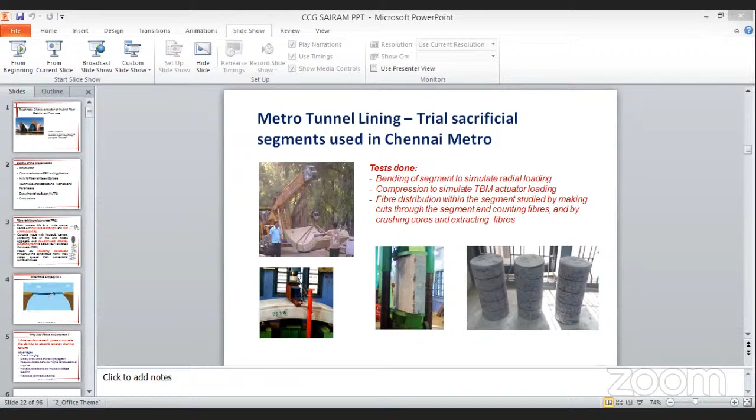Thank you sir for your nice introduction and welcoming me. I am also really grateful to you as a doctoral student - you have guided me so many things during my doctoral committee meeting. I am happy to be part of this online FDP program, and happy to know that Sairam Engineering College is daily conducting webinars and industry interactions, which is really useful for present students as well as our faculty fraternity. It's a very good effort, and I congratulate all the faculties taking so many efforts in bringing out this type of program. So I think I can move on to my presentation.

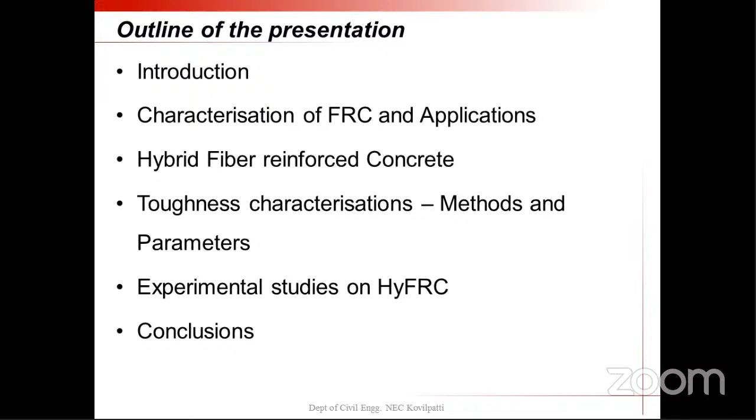In hybrid FRC, the toughness characteristics, measurement methods, testing methods, and what parameters have been considered for the investigation - all those things will be discussed. Based on the results, we can make some concluding remarks based on these measurements.

Fiber reinforced concrete is not a recent technology. It is already developed for the past 4 to 5 decades. So why are fibers added? Because concrete has very low tensile strength and low strain capacity, which may cause sudden failure or brittle failure to the structure.

In order to improve that property and change the behavior of the concrete, these discontinuous or discrete fibers are added inside the concrete. It is added along with the regular conventional material like hydraulic cement, fine aggregate, coarse aggregate, along with the chemical admixture and mineral admixtures. These discontinuous fibers can be added.

This definition is given by the ACI committee: it's concrete made with hydraulic cement containing fine and coarse aggregates along with discontinuous fibers. One special thing about fiber reinforced concrete is that the fiber is distributed throughout the entire composite.

Suppose we want to improve the tensile strength by means of our conventional reinforcement bars - these bars will be located only at specified locations, so it will improve the tensile strength only up to the peak values. Whereas in fiber reinforced concrete, the fibers are distributed throughout the cement matrix, and the fiber spacing is also very close, so it will improve the overall behavior of the cement composite.

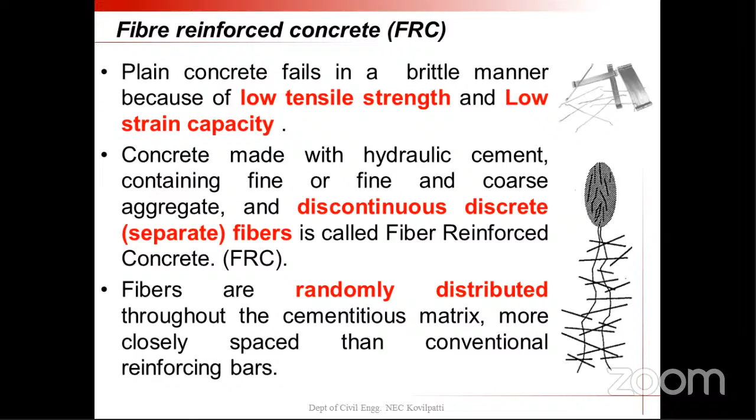It is not only bridging the crack, sometimes it is delaying crack control, delaying the formation of the crack. It will take large amounts of tensile strain before rupture, and especially it provides more resistance during impact and fatigue loading. Some microfibers, which are smaller in size, are particularly used to reduce shrinkage cracking.

So fiber reinforcement mainly gives the concrete the ability to absorb more energy during failure. So far our code has not addressed the energy absorption mechanism, but in future it may be expected, and at that time this research results may be incorporated into the codal provisions to address that particular aspect.

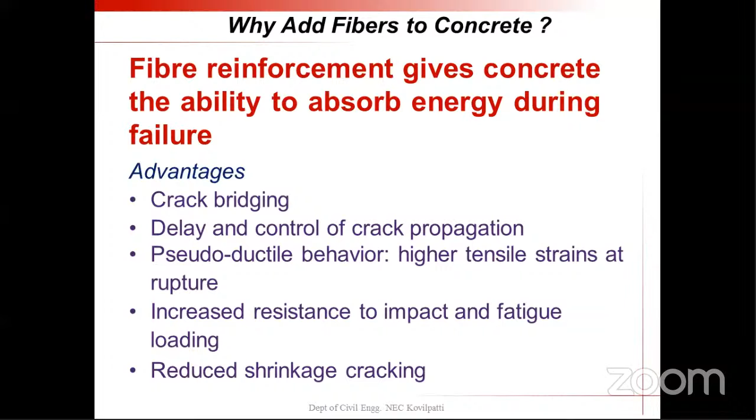So far our code discusses only the strength concept. In future, when we are doing performance-based design, all these toughness characteristics may be taken into account for the design purpose. So I can say the fiber dosage is very small - we can add up to 1%.

Beyond 1%, it's very, very difficult to produce. It needs some special production techniques and equipment. So up to 1%, we can easily do all these things without any workability problem. This is a main point we have to notice.

Some people add fibers and produce results claiming compressive strength has been improved, but totally it is wrong. Fibers are not added to improve the compressive strength, or even tensile strength - it is used only for improving the toughening mechanism, only for improving the energy absorption capacity under various loading.

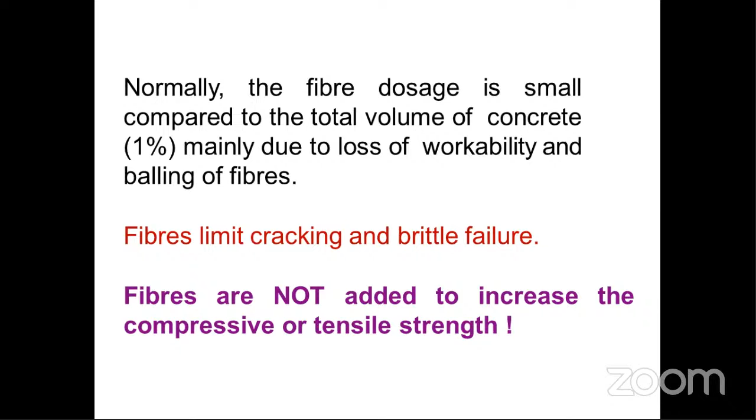One thing I want to clearly define is that fibers are not added to improve the compressive strength or tensile strength of the concrete. It is added only to limit the cracking and to avoid the brittle failure of the structure.

There are so many types of fibers available, and these fibers are commercially available. Metallic fibers like steel, stainless steel, amorphous steel, and polymeric fibers like polypropylene, nylon, polyester, carbon, etc. And mineral fibers like glass and basalt are popular. Nowadays, naturally occurring fibers like sisal, cellulose, jute, and coconut are also available.

These fibers are not one and the same. They surely differ in their properties. Only based on these properties does their constitutive response, whenever included in concrete, get altered. These are the properties taken from Bentur and Mindess's textbook, so we can see different types of fibers.

That is normally used in making cement concrete composites: steel fiber, glass fiber, asbestos, polypropylene, carbon, nylon, cellulose, sisal, polyethylene, etc. Among these, I have worked with steel fiber, glass fiber, polypropylene, and sisal fiber. In addition, recently I worked with Juliflora fibers, natural fibers, metallized plastic waste fibers, keratin fiber reinforced concrete, and sisal fiber reinforced concrete. So easily we can work on fiber reinforced concrete incorporating these types of fibers.

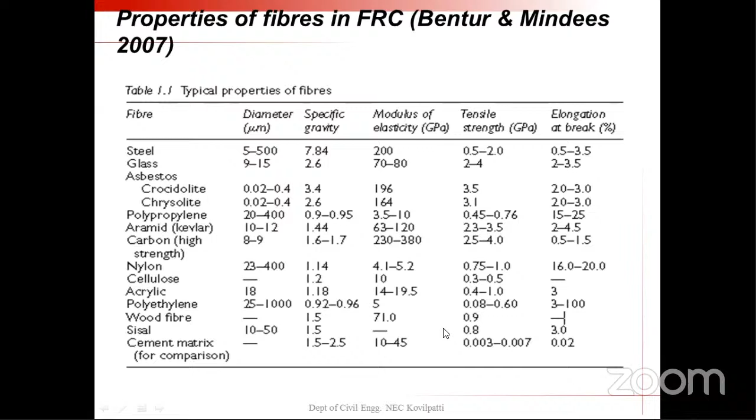This modulus of elasticity and specific gravity, everything is very important. All these factors govern the constitutive response of the fibers when used in the concrete.

This fiber reinforced concrete has been developed for the past 4 decades, and it is still in the area of development. Even though around 10,000 literatures have been published in this area, many practical applications have also been implemented globally and even in our country. I will quote some examples because many people wonder how this research translates to practical application. So to increase that hope and to make FRC a promising material, we should show some practical applications.

I think it's better to project some practical applications where it is used. Steel fiber reinforced concrete is a popular fiber, and most literature has dealt only with steel fiber reinforced concrete. It is used in the shotcrete technique because it provides sufficient resistance against shrinkage, cracking, and impact. It can take impact loads and compressive loads in floors and pavements.

These types of slabs, precast segments, have been used with the incorporation of steel fibers. But even though we are using it for precast applications, some difficulty exists in bringing this concept to structural design. That is mainly because of the lack of available standards, since it is still at the research point and needs more material characterization.

Testing methods also differ from one forum to another. RILEM will recommend one testing method, while the Japanese Concrete Institute will measure the same parameters using a different technique, and ACI will recommend yet another testing technique. So there are many testing methods available, and we don't get a clear idea of which one should be properly followed. That type of confusion still exists in measuring properties for FRC.

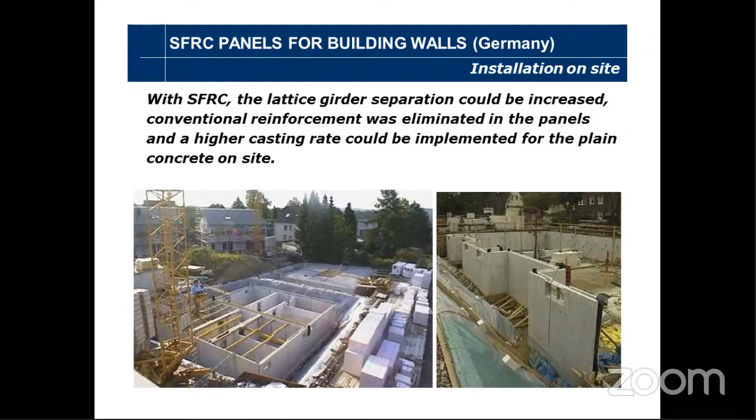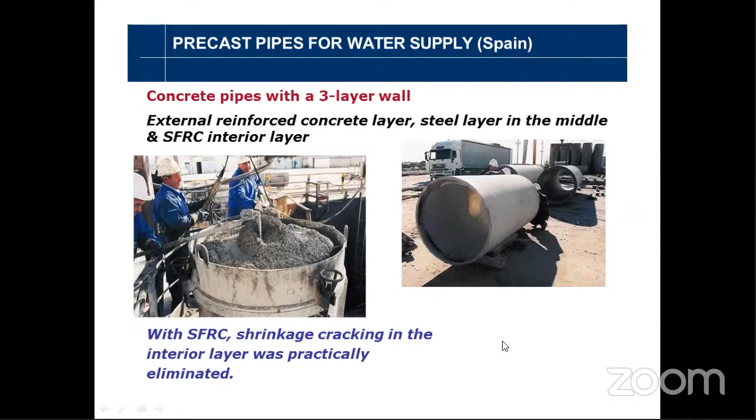The third application is precast pipes with the inclusion of fiber reinforced concrete. It is also very easy: the inside layer is made up of FRC, then a steel layer is provided, then it is covered with a concrete layer. Here the SFRC plays a vital role in controlling the shrinkage cracking, which is most expected inside this cement lining provided as the inside layer.

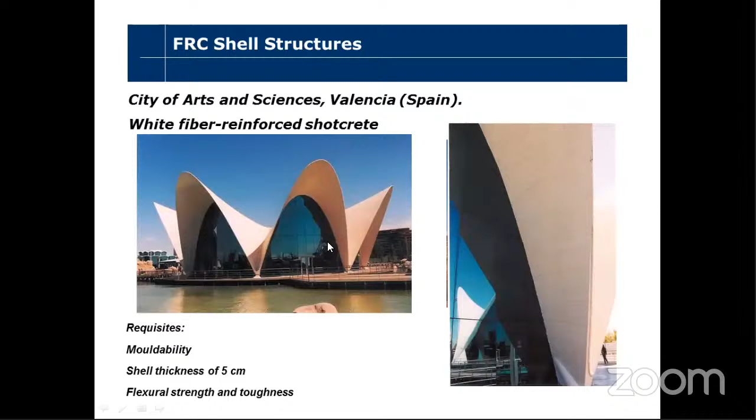This FRC shell structure I have displayed in my welcome slide. This figure you might have seen. Actually this is a FRC structure, and the shell thickness is only 5 centimeters, and it is called white fiber reinforced shotcrete. It has got sufficient flexural strength and toughness. Just imagine, the thickness is only 5 centimeters.

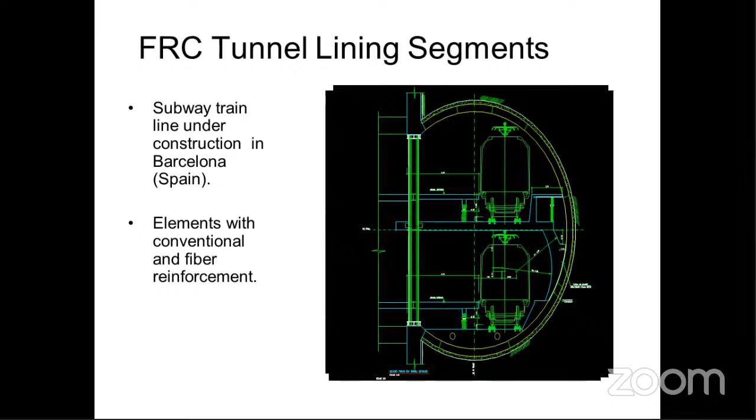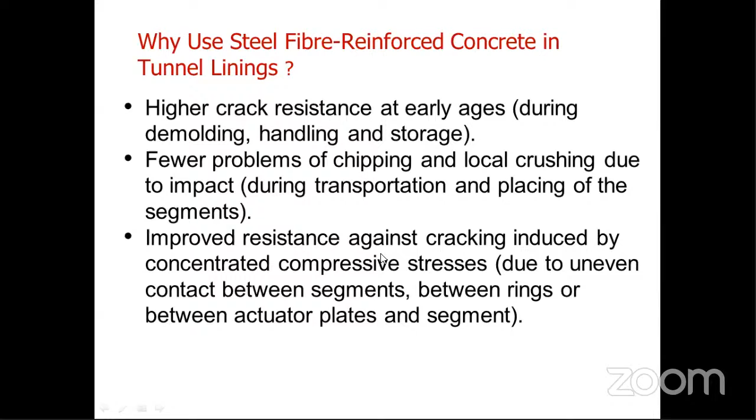FRC tunnel lining segments also find wide applications in the construction industry. In Barcelona, Spain, an entire tunnel has been constructed with SFRC precast segments for a tunnel depth of 0.9 meter. We use precast segments for tunnel lining because there may be a problem of chipping and local crushing when trains are moving. So to avoid this type of failure and to improve crack resistance at early ages, this SFRC has been used as a tunnel lining material. There will also be a lot of compressive stress induced because of uneven contact between segments, so steel fiber reinforced concrete tunnel linings have been used for this purpose.

Not only worldwide, we can find some examples in our place also. In Chennai, at IIT Madras, they have provided a road marching towards the dining hall. This entire pavement is made up of SFRC with the incorporation of steel fibers, and 30% fly ash has been added, along with around 25 kg per meter cube, that is about 0.25% volume fraction of steel fibers. This whitetopping is made with SFRC, steel fiber reinforced concrete, and is available at IIT Madras. The grade of concrete is M35, and it can be adopted for any type of grading.

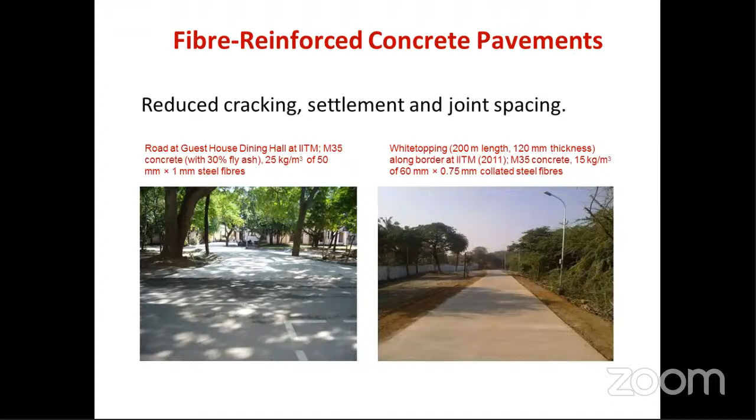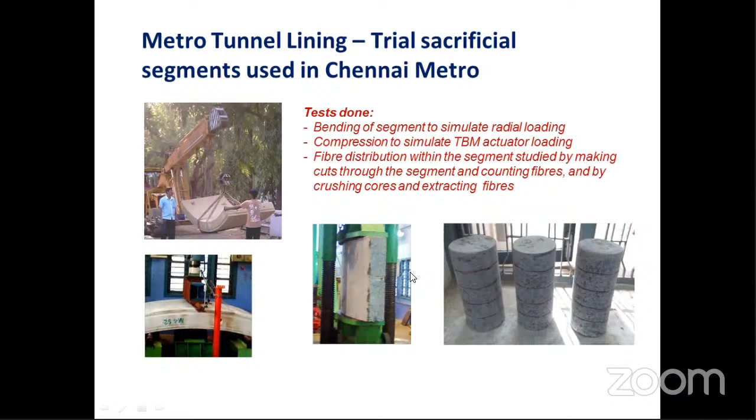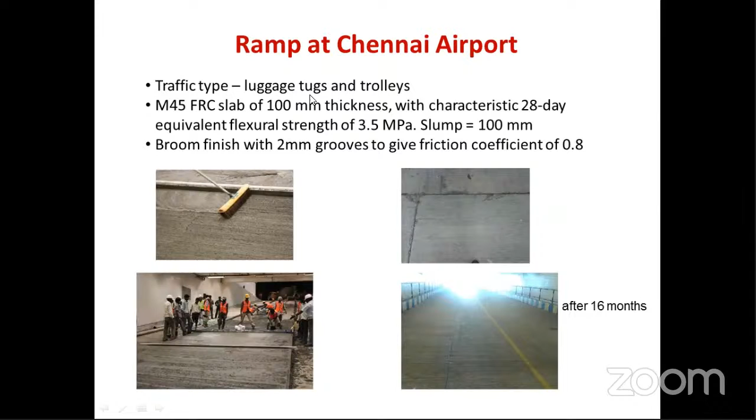Due to this transfer, sometimes fiber pull-out may occur. But if the fiber is not able to withstand that stress, failure may take place by two mechanisms: either a fiber pull-out mechanism or a fiber rupture mechanism. During my experimental investigation, I observed all the specimens underwent fiber pull-out mechanism, because fiber rupture can occur only at high tensile stresses. We are not going to apply that much stress to the concrete, since fiber's tensile strength may be varying from 1600 to 1700 MPa.

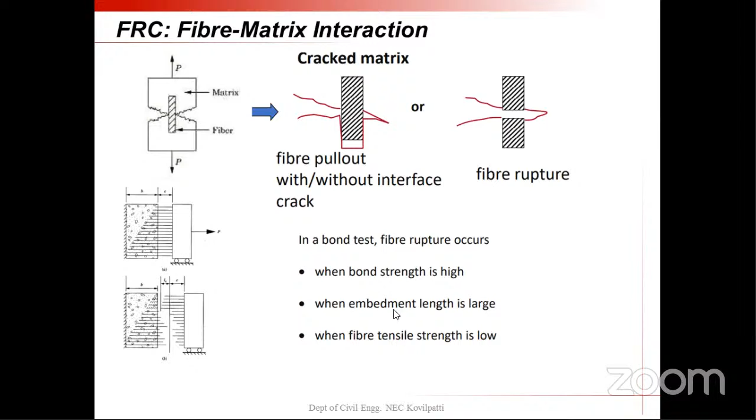So I observed most of these specimens failed only because of fiber pullout. Fiber rupture rarely occurs, and it happens only when the bond strength is very high, when the embedment length is large, and when the fiber's tensile strength is low. But the third condition is not really possible. If that condition occurs, then fiber rupture may occur. This is one point I want to mention.

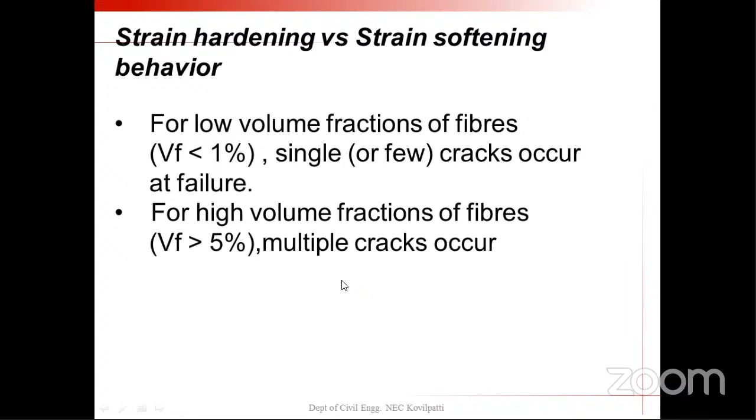So this is the point I mentioned: low volume fraction, only single cracks may occur, that is strain softening. High volume fraction, more than 5%, multiple cracks occur, that's strain hardening. So this is the strain softening and strain hardening diagram.

So in the first diagram you can see three parts. First it is moving in an ascending manner and reaches the peak stress. For this type of conventional FRC, only one crack has been formed, and this one crack is called single crack localization. This crack will get open and it will not take any stress, so normally the stress is also lower than the peak stress.

After that, the fiber bridging across that one crack will fail either by pull out or by rupture process, and the concrete will offer some resistance but it is very negligible. After this crack localization, it will not take any stress, it is decreasing and finally reaching a negligible value. This curve is very important because we are going to take the energy absorbing mechanism based only on the area below the diagram. This is strain softening.

Strain softening consists of three parts: first reaching the peak, then attaining the localization, then the stress decreases with the increase in strain. Three parts, this is called strain softening. Then strain hardening is totally different, though the first segment is very similar.

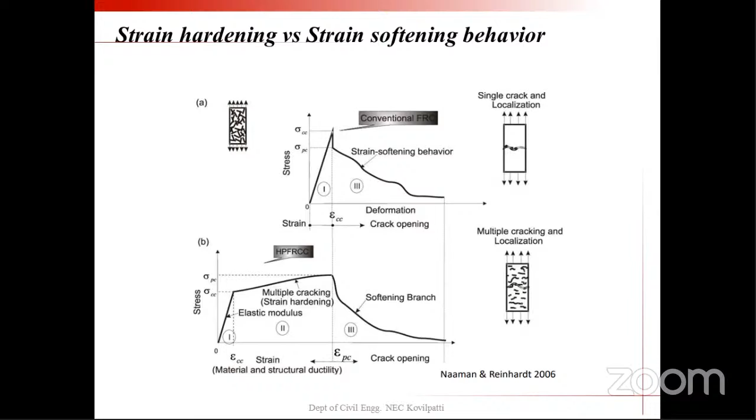So we understood from this theory that concrete cracking does not take place all at once - it is gradual and multi-scale, and there is a possibility of controlling the crack growth. That idea evolved based on previous photographs showing concrete cracking takes place in a gradual, multi-scale level. So instead of adding one fiber, since each fiber plays its own role, I thought of adding different fibers in the same composite, and that's called hybrid fiber reinforced concrete.

Not only do fiber materials differ, the sizes of the fiber also differ, along with the volume fraction and modulus of elasticity. Everything has been combined to produce a new composite called steel polyester hybrid fiber reinforced concrete. Why did I choose steel fiber? Steel fiber is popular and available everywhere, and it has been used for many applications. Polyester fiber was getting popular in India at that time, so I thought of adding polyester fiber to explore the properties made with the combination of steel and polyester through this research.

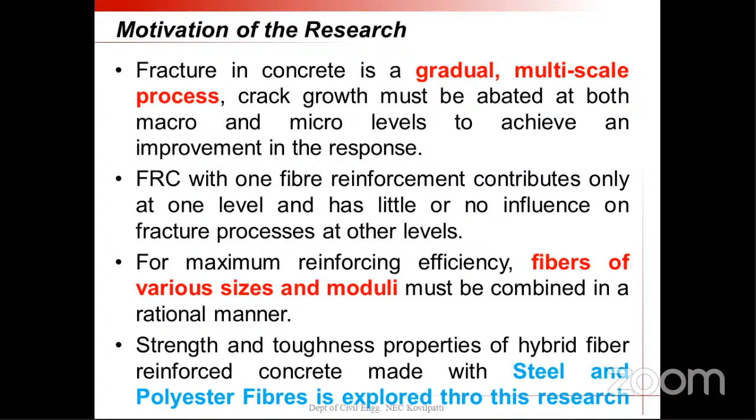The concept of hybridization is also a matured science nowadays. We are adding two or more fibers in the same composite, and the resulting mix is often known as hybrid FRC. One fiber will complement the usage of the other fiber, effectively utilizing the potential property of the other fiber, making the entire composite effective. This concept is a very good idea, and we can explore a lot of properties of this hybrid FRC still.

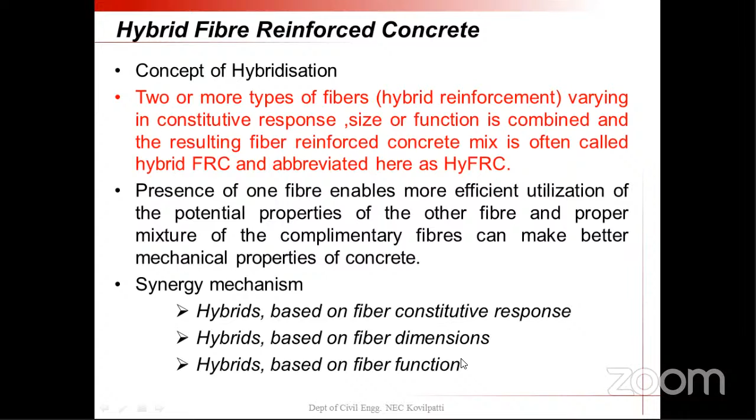Synergy mechanism can be made based on the fiber constitutive response, fiber dimension. One fiber may be suitable for improving the hardened property, the other may be useful for improving the low modulus or fresh properties. So we can make combinations by means of constitutive response, fiber dimension, short fiber, long fiber, and fiber function. Some fiber has very low stiffness, some fiber may have high stiffness. So we made some combinations.

Characterization of any new composite is always essential, because only then can we identify the material. We can quantify the characterization, we can qualify the characterization, and we can check whether the material is robust enough to withstand the specific purpose. So we always need proper characterization of any material.

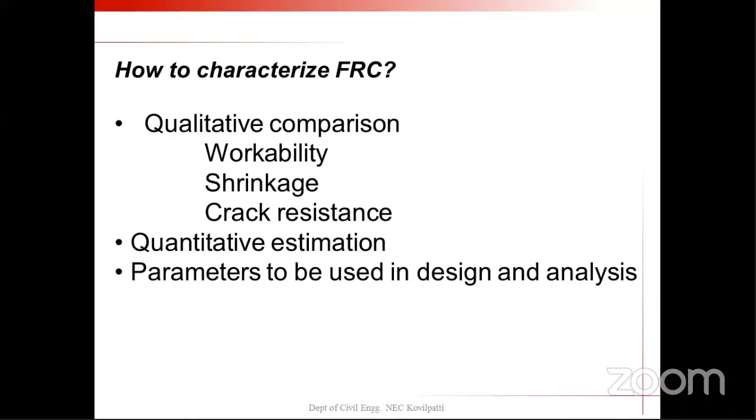Especially in FRC, we always concentrate on workability, shrinkage, and crack resistance. The quantitative information is also made only on these properties: crack resistance, mechanical properties, toughening mechanisms. These parameters are further useful for design analysis. No need to concentrate on other properties like durability -- those can be dealt with later. The primary measurement should be focused only on workability, shrinkage, crack resistance, and toughening mechanisms.

So I have chosen 45 MPa grade of concrete, and the mix design is as usual, as per our conventional method. Cement has been added up to 395 kg, fly ash has been replaced with 15%, silica fume 7%, and combined gradation has been done with two sizes of aggregate, 20 mm and 12 mm, and high range water reducing PC based admixture has been used.

This is very essential -- it's a new generation chemical admixture used for reducing the water requirements for the production of some cement composites. High range, polycarboxylic ether based admixture has been used, and this table shows the fibers used in the test: steel fiber and polyester fiber.

I have adopted this hooked end mechanical fiber for us. It's a very good geometry, providing proper anchorage to the composite during crack resistance. These properties are essential when fixing the volume fractions of the fibers.

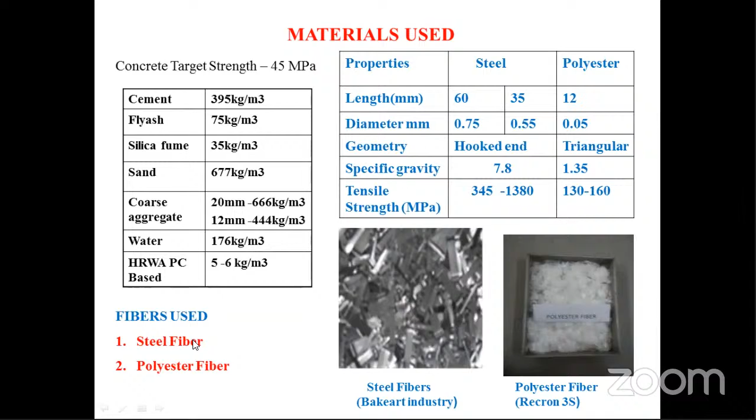So these two fibers have been added, and these are the series of mixes I have adopted. I have adopted 4 series of concrete mixes: control, steel fiber, polyester fiber reinforced concrete, and hybrid fiber reinforced concrete. And these are the volume fractions.

There are no strict rules and laws to choose this. We can randomly adopt it -- I just wanted to understand the behavior, so I adopted these fractions randomly. I referred to some literature and adopted this type of volume fraction for the production of concrete samples. For the toughness characteristics, I added some more series because this is my main area of research.

We compulsorily have to adopt this type of pan mixer for production of FRC, because we are adding the fiber, similar to adding sand. So it should be properly distributed -- the mixture should be homogeneous. In order to make the composite homogeneous, the fiber should be properly distributed throughout the mix, and the mixing process should also be done carefully.

And you can see, table vibration is recommended in the literature, because we cannot adopt any internal vibration like needle vibrator compaction, since we cannot place the vibrator inside the FRC.

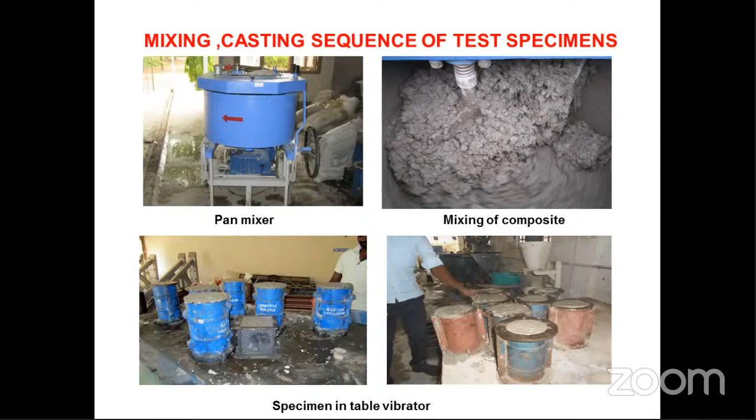There will be some obstruction. Literature has recommended only the table vibration. These are the casting sequence of specimens. Specimens have been casted carefully, and immersed in water curing for 28 days.

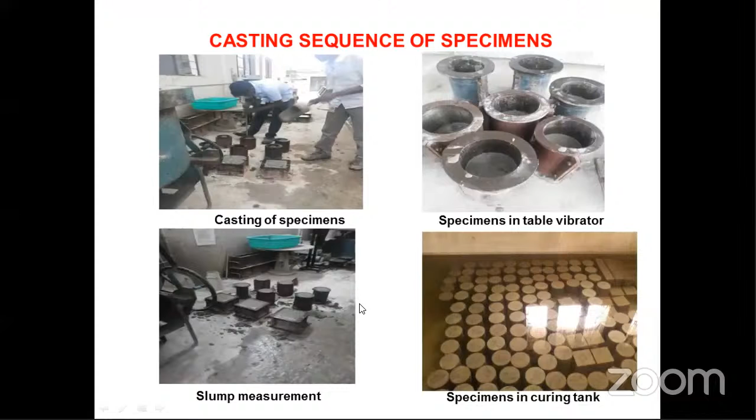I have also added silica fume as well as supplementary cementitious material like fly ash. The nature of fly ash is spherical, and particles that are spherical in nature give less frictional resistance, which will obviously improve the workability properties. Silica fume is also finely dispersed particles. So all these things help to improve the slump properties of the concrete.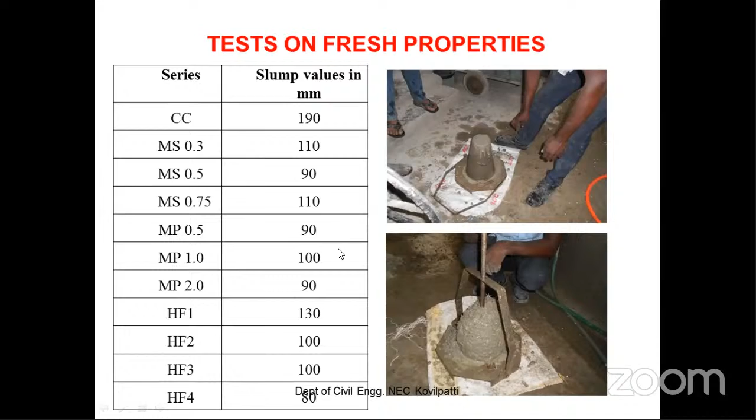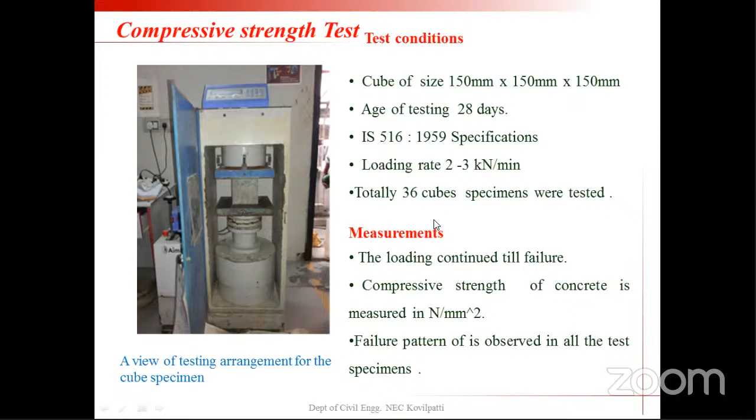Test series has been conducted as per standard procedures mentioned in the IS codal provisions. For each series, 3 specimens have been tested, and compressive strength test was conducted as per IS 516. Split tensile strength was conducted on cylinders at the age of 28 days as per IS 5816 specifications, and the split tensile strength was measured. Also, every time the failure pattern is observed, especially in case of FRC, the failure pattern has to be observed. The modulus of rupture was tested on 100 mm by 100 mm, 500 mm long specimens as per the 516 procedure.

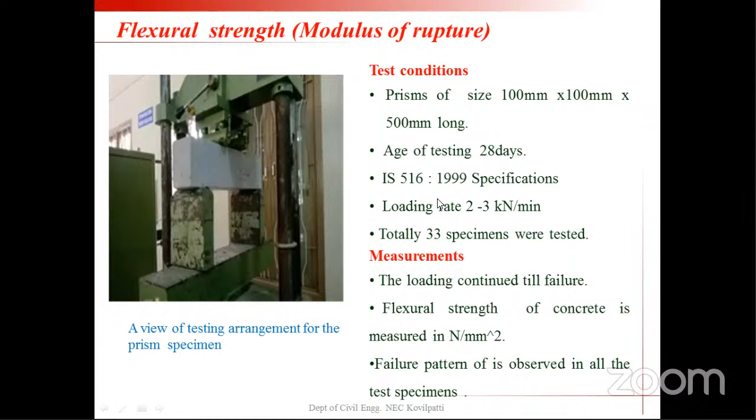These are the test results of the 4 series. Please observe the last column of the table. From this we can understand the effectiveness of adding the fiber. Control concrete gives a reference value, and in the steel fiber series you can see the range is increasing, with an increment of only 10 to 14%.

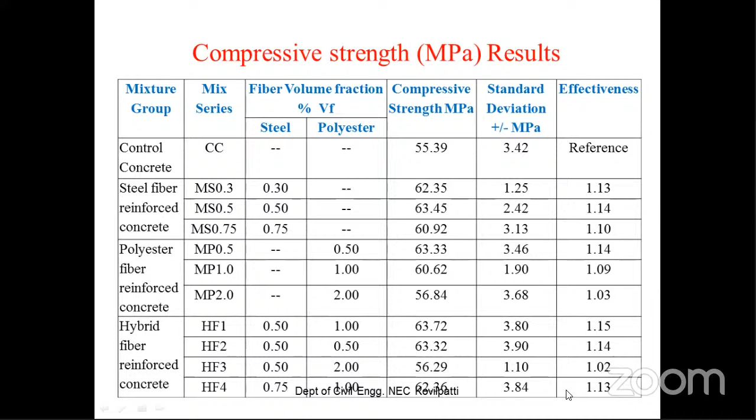In polyester fiber it is a little bit lower, sometimes only a 3% improvement. In hybrid fiber reinforced concrete also, the maximum improvement is only up to 15%. So what we can conclude is fibers will improve the compressive strength, though in single FRC or hybrid FRC the improvement is very marginal, observed only up to 15%.

The confinement of the fiber and the tension stiffening effects of the fiber will improve the compressive strength. I have also added 5% silica fume, which enhances the bond property between the fiber matrix and the concrete, providing a dense microstructure always. So all these parameters have influenced the compressive strength, but no very big change is expected, only 15%.

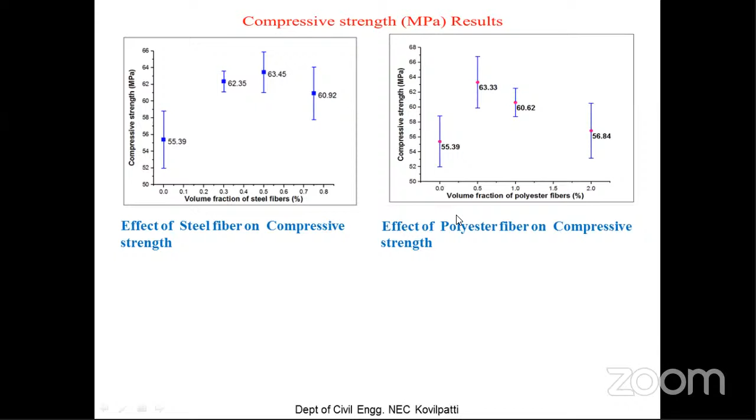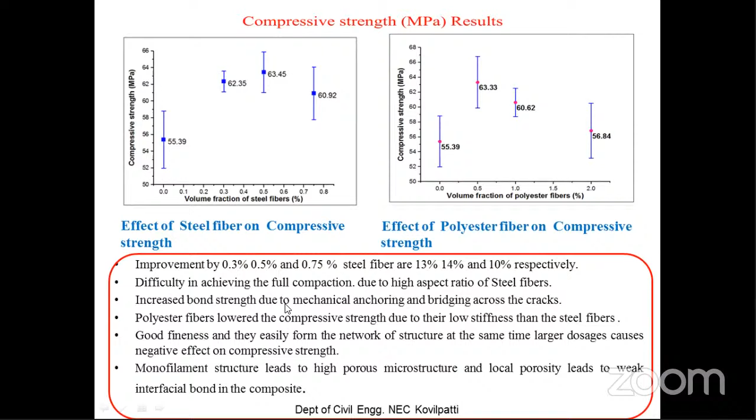So I have analyzed whether the influence is based on the effect of fibers on single fiber FRC - steel fiber on compressive strength, and effect of polyester fiber on compressive strength. These observations show that with polyester fiber, the compressive strength is lowered because of the low stiffness, which is already an expected property. Whereas with steel fiber it has been improved because it has good mechanical anchoring, and bridging across the cracks is also very good.

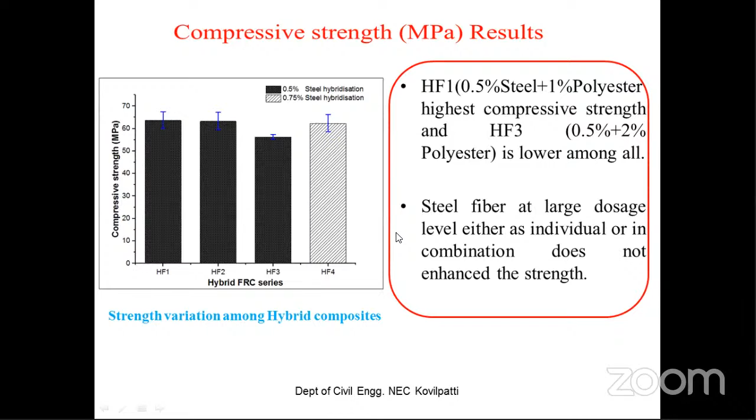This diagram is a comparison made based on the hybrid FRC series. Among the 4 series, HF3, which has high polyester fiber content, has the lowest value among all 4 series. So the conclusion is steel fiber, either as a single dosage or in a hybrid combination, is not going to enhance the compressive strength much. This is the conclusion for compressive strength, but in split tensile strength you can see a drastic change - the improvement is observed to be 46%, 63%, and 80%.

In polyester fiber, the improvement is ranging from 18 to 26. Again, in hybrid fiber reinforced concrete it is ranging from 66 to 72. So you can see a very good improvement in case of split tensile strength. All the specimens have shown higher split tensile strength than the control concrete.

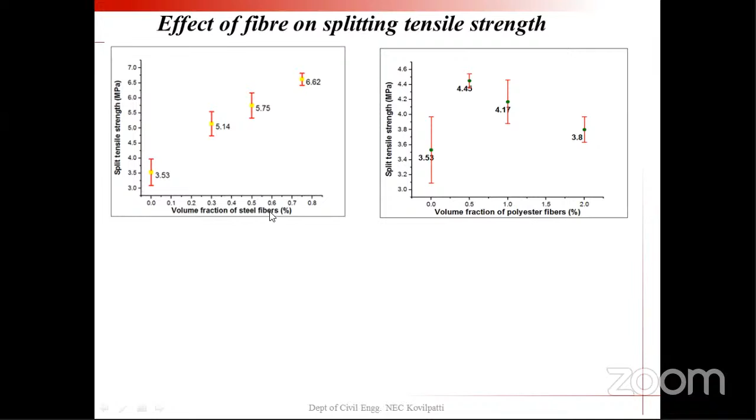The analysis was made with the help of values obtained in the single fiber concrete, volume fraction versus split tensile strength. You can see the enhancement for steel fiber is ranging from 46% to 80%. It's a very favorable property, and one useful property that can be further explored for performance-based design.

The higher stiffness bridging across the steel fibers is the main reason. It bridges across the cracks, increases the load, and enhances the split tensile strength. Most of the failures were pull-out failures; there was no fracture failure.

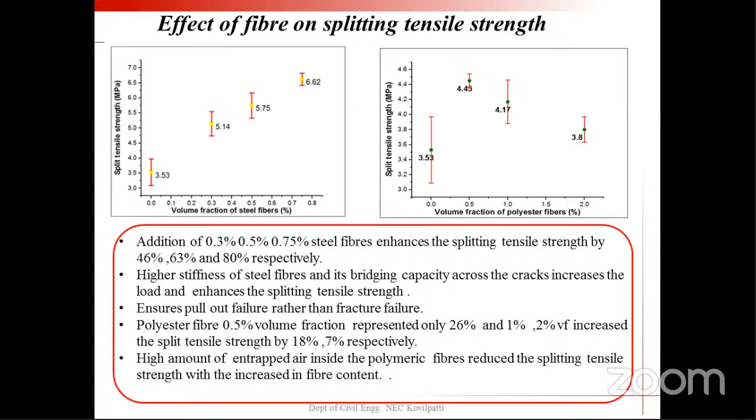When looking into the polyester fiber, the improvement is only 17-18%, because once polyester fiber has been added, we observed a lot of entrapment of air inside the concrete, which totally reduces the strength of the concrete. This comparison is also made.

The next property is flexural strength. Even though my title is about toughness characterization, while characterizing the entire composite I have made some studies related to strength aspects also. At this juncture, I want to mention that.

Flexural strength improvement is somewhat lower than the split tensile strength improvement, but not a big drop. Steel fiber reinforced concrete improvement is between 16 to 56%. Polyester showed between 13 to 31% improvement with increase in fiber content. Hybrid fiber reinforced content improvement is in the range of 36 to 60%.

The percentage of MOR values has been approximately improved 31 to 60%. Among them, the HF4 series, which contains more steel fibers and more polyester fibers, shows the highest flexural strength. No MOR value decreased with increase in fiber content.

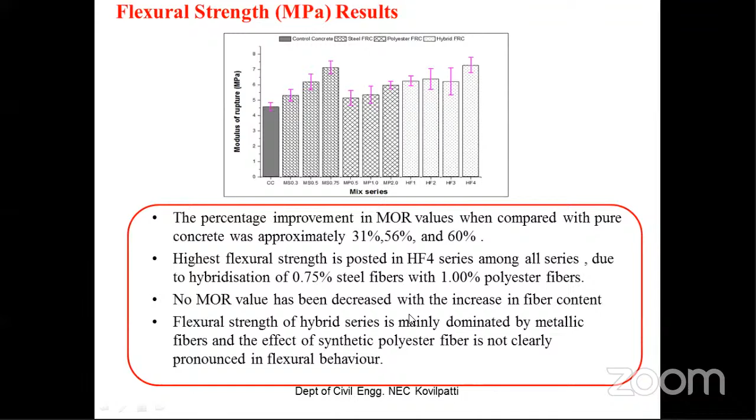In the previous two strength aspects, we observed some changes going both ways, but in flexural strength, with increase in fiber content the flexural strength keeps increasing. We observed the hybrid series is mainly dominated by the metallic fibers, and synthetic fiber behavior is not much pronounced. This is a comparison made with the single fiber FRC and modulus of rupture.

Below the neutral axis, the bridging crack mechanism is well defined, and they delay crack propagation. They preserve the integrity of the specimen, and fiber failure takes place by pull-out, which indicates good bond strength between the fibers and the matrix.

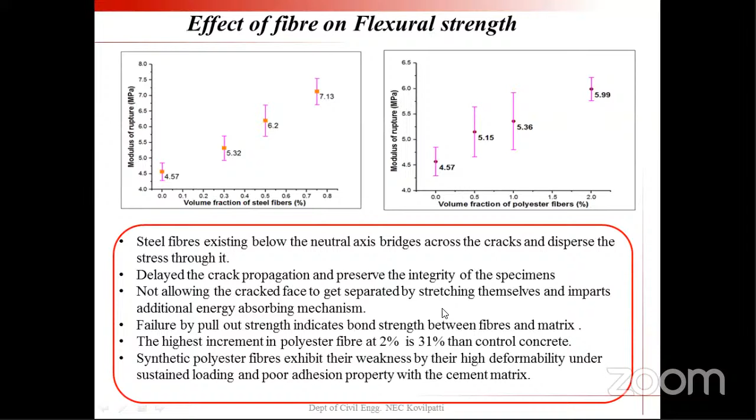The synthetic fibers exhibit weakness because of their low stiffness, high deformation, and poor adhesion properties. This is again the comparison made among the hybrid fiber series, compared with the steel fiber combinations. HF1, HF2, HF3 are generated with MS.5 combined with polyester, and HF4 is made with the combination of MS.75 and other polyester.

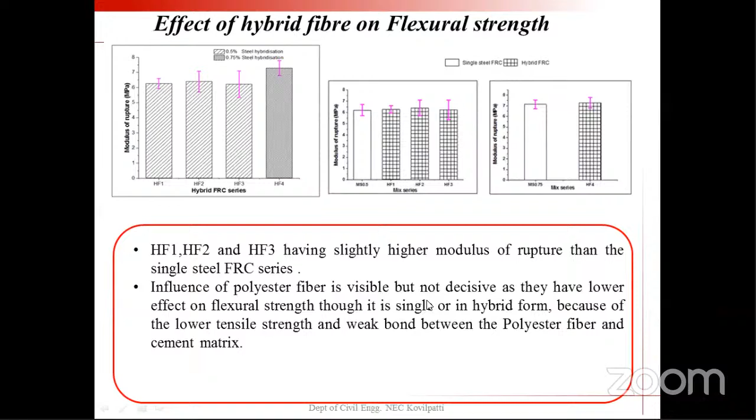The comparison is made with single FRC and hybrid FRC here also. It shows high modulus of rupture, and again the polyester fiber property is not decisive since it produced very low flexural strength. Next, I'll focus on the energy absorbing capacity.

This is one of the special properties of fiber reinforced concrete and hybrid fiber reinforced concrete. The toughness property is very much essential because it enhances crack resistance. FRC fibers enhance crack resistance and energy absorption capacity. Toughening can be measured in various ways: compression, tension, shear, flexure.

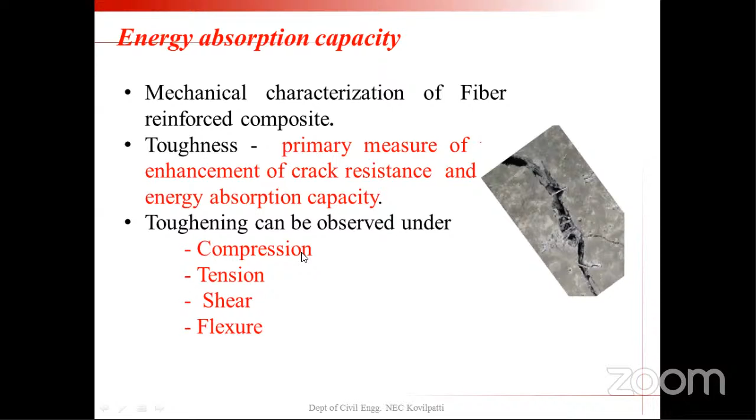If sufficient testing facilities are available, we can check all the toughening mechanisms. Based on the availability of equipment, I focused only on compression toughening under compressive load, and split tension toughening mechanism. So what is energy absorption capacity? This is the area below the load displacement curve, or stress displacement curve.

Whatever is appropriate - if it is strain softening, we can take stress versus deflection; if it is a strain hardening stage, we can take stress versus strain. Here the sharp post-peak drop is avoided in the energy absorption capacity. You can see the long plateau after the post peak has been reached, and post-peak ductility increases with the increase in dosage and effectiveness of the fibers.

Normally we take the area below this curve as the toughening effect of fibers in concrete. To measure the toughening effect, I have taken three mechanisms.

One is impact resistance. Second, split tension under this toughening mechanism has been measured.

Third, under pure axial compression, the toughening mechanism has been measured. So for impact resistance, I conducted a drop weight impact test called the Schrader impact test on disc specimens of 150 mm diameter and 62.5 mm thickness.

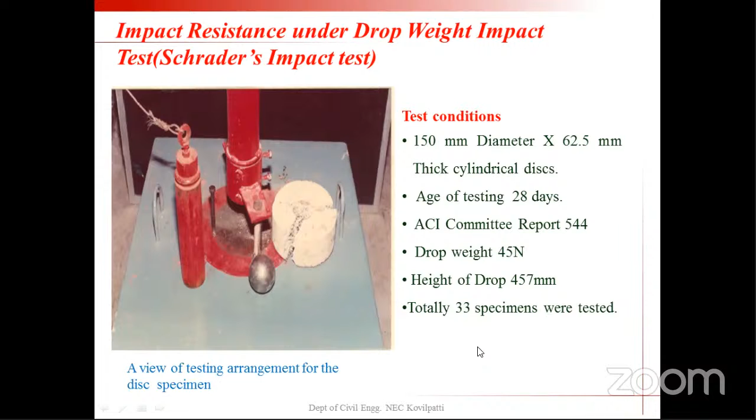It is conducted as per ACI 544 at the age of 28 days curing. This is a very simple test. We make disc specimens which are placed under a drop weight hammer, inside this plunger the hammer is inserted, and we give a number of blows. The height of drop is measured to be 457 mm, and the specimens were cut by means of a concrete cutting machine to make these disc specimens.

Initially I made the cylinder, then it is cut into disc specimens to do this Schrader impact test. It is placed between three bottom screws and provided with some damping effect to avoid movement. Then a hammer blow is allowed on the disc specimen, and the number of blows is counted to cause the first crack and ultimate failure. So this is the observation we have to take.

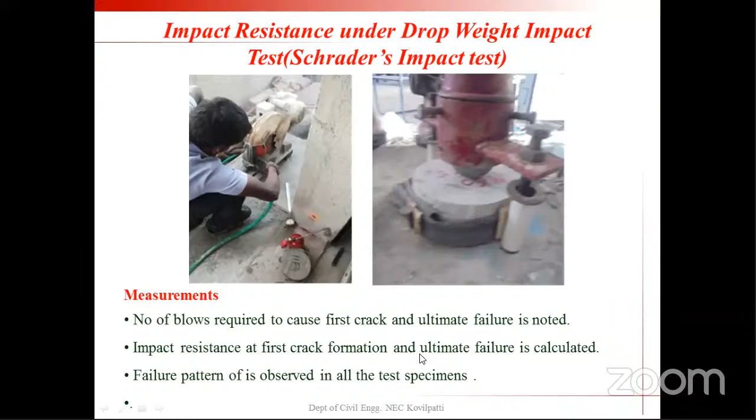Based on the blows, we can convert it to the energy absorbed by the specimens. Ultimate failure and first crack observations, and failure pattern, are also noted. This table shows the impact resistance, energy absorption capacity under impact load. First crack under impact load: this column shows the energy absorbed at first crack, and the next column shows the energy absorbed at ultimate failure.

So the control concrete, you just see it is only 82. Steel fiber reinforced concrete, the energy absorbed in joules ranges from 164 to 596. MS 0.75 volume fraction has reached 596 joules energy absorption capacity. And the polyester fibers have shown very poor resistance in case of impact, so the energy absorbed is only 41.13, whereas the steel fibers have absorbed impact energy up to 596.

For hybrid fiber reinforced concrete at first crack, the energy absorption is again extended to a higher value, ranging from 164 up to 514. This is for first crack. Whereas in ultimate failure, the improvement was very good.

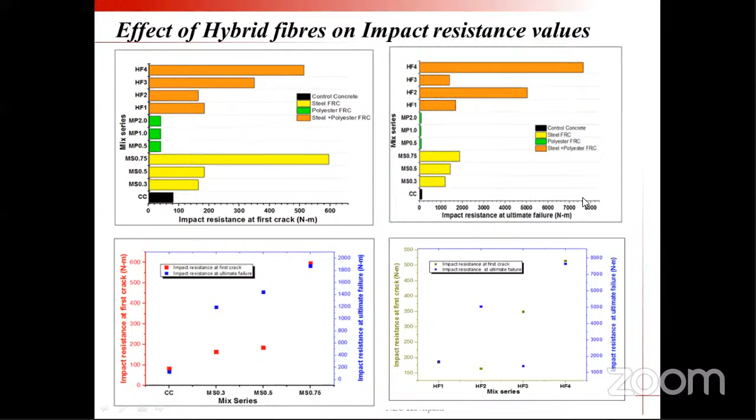So this is the first crack diagram. All these orange bars show the highest energy absorption capacity made by the hybrid fiber HF series. The green, which is almost negligible, is the polyester fiber series. And yellow is the single steel fiber series. So this diagram clearly dictates the amount of energy absorbed during the impact load.

So I can conclude it as high fracture energy. The energy has increased 15 times because of the good bonding anchorage. And in hybrid FRC, the improvement is up to 62 times.

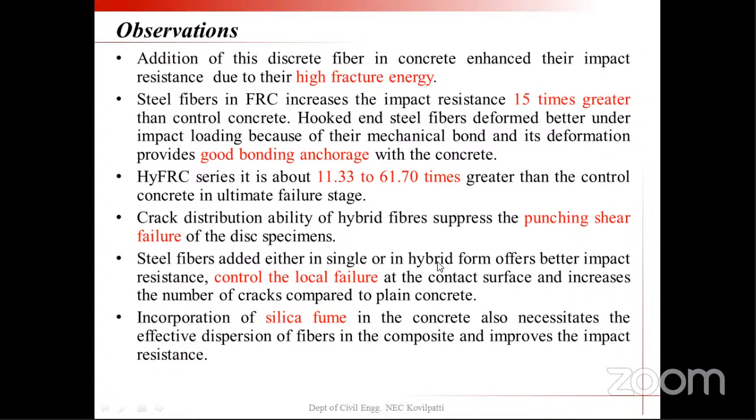While observing the failure pattern, punching shear failure is observed on the disc specimens. Steel fibers provide better impact resistance to control the local failure. In addition, silica fume also necessitates effective dispersion of fibers throughout the composite and improves impact resistance. With hybridization, no clear trend is observed with respect to the fiber content.

With these values, I cannot draw a clear conclusion because the values change very randomly. So it is very difficult to make a clear conclusion about impact resistance in hybrid FRC with respect to fiber content. Excess polyester fiber content decreases the impact resistance. The highest energy observed in the HF4 series shows the ductile response of the members. Impact resistance has been increased several times.

So the same comparison has been made with the graph. Next, the energy absorption, toughening and toughness characterization has been measured under split tension. I conducted the Brazilian test as per the literature. This testing procedure is followed as per the literature given in the slide.

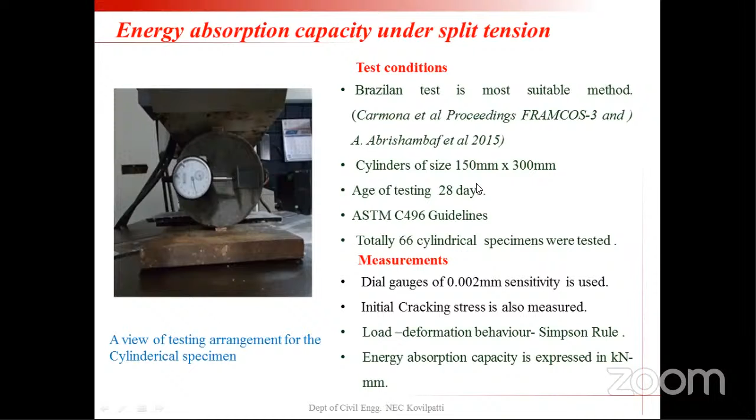It is conducted on the normal cylinder, and this type of special attachment has been made to measure the deformation, using dial gauges of 0.002 mm sensitivity. So from the load-deflection curve, from the load versus deformation observation, I measured the initial cracking stress and plotted the load-deformation curve to measure the energy absorption capacity.

And this is the arrangement of the split tension toughening test. I attached this dial gauge to the steel cylinder by means of an L-shaped steel plate with proper adhesives.

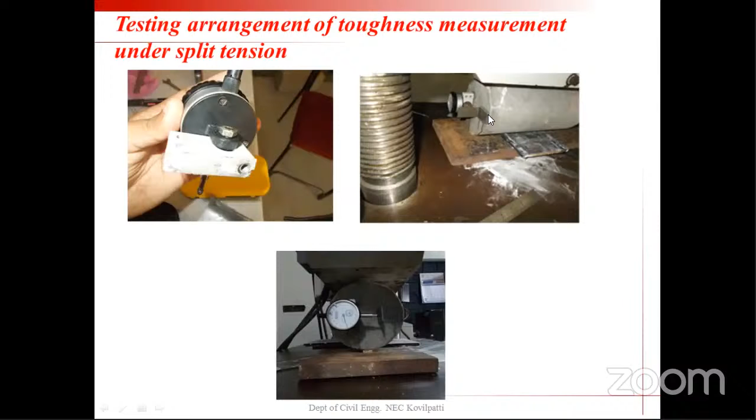The load is applied in an incremental manner and the corresponding deformation is measured. This is called load control measurement, but it is better to go with strain control measurements in FRC. The displacement has to be controlled and the corresponding load measured. This is the proper way to measure FRC, so I followed strain control measurements in my experimental observation.

You can see the initial cracking stress under split tension loading condition. The last four rows are the hybrid fiber series. The split tensile stresses ranged from 2.4 to 3.82, whereas control concrete was 1.3 and steel fiber was 2.1. In polyester fiber, it ranged from 1.2 to 1.7.

We plotted load deflection behavior for various series. For example, the area below the HF1 series for the three specimens is reported as 145.63.

Normally we have to cast more specimens when doing this type of experimental investigation, because we have to do a lot of trial procedures before we can take the final concluding values. Just placing the specimen and immediately taking results is surely impossible in case of FRC or hybrid FRC measurements, because each and every deflection will alter the behavior of the concrete. So I used to cast 8 to 10 specimens for each series.

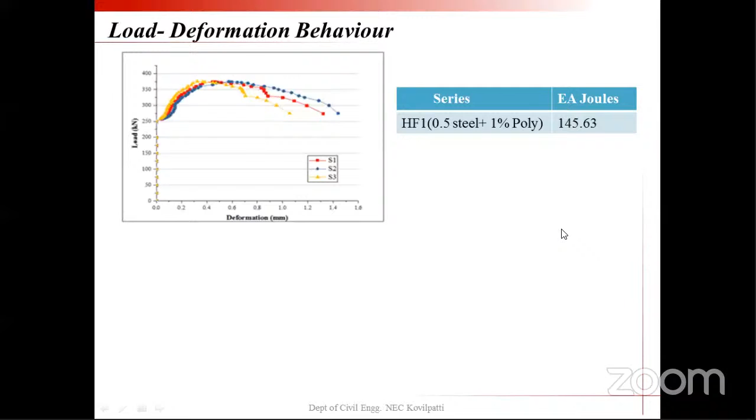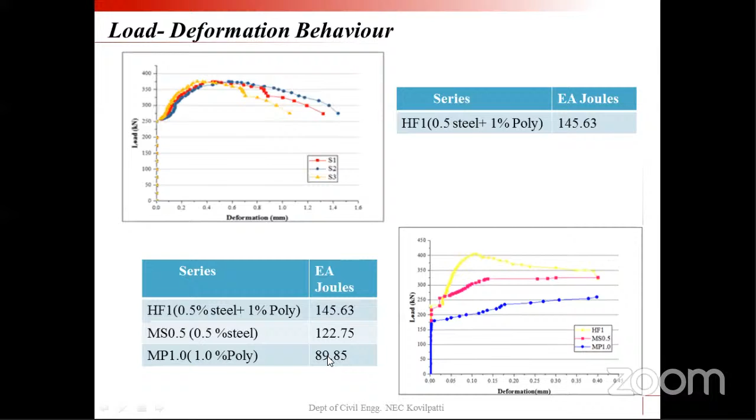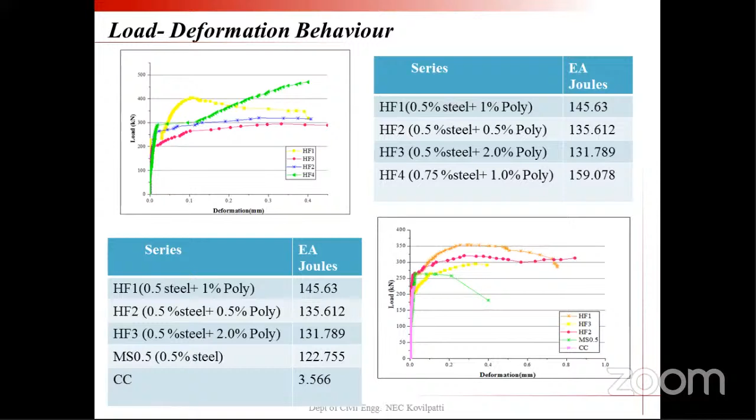You can see this rose color curve. The rose color curve indicates the abrupt sudden failure that happened in the control concrete. The energy absorption capacity values represented in the diagram are shown in the sketch.

This comparison shows the initial cracking stress improvement observed to be in the range of 13 to 69. In the HF1, 2, 3 series, the values improved by 62, 72, and 26. All these observations were made as part of the experimental work, and I can see the initial cracking stress improvement is 69% greater.

This is provided because of the effective stress redistribution, and we can see the energy absorption curve has a long plateau in the deformation curve. I observed a positive interaction between the fibers because they provided an effective crack control mechanism to withstand the load.

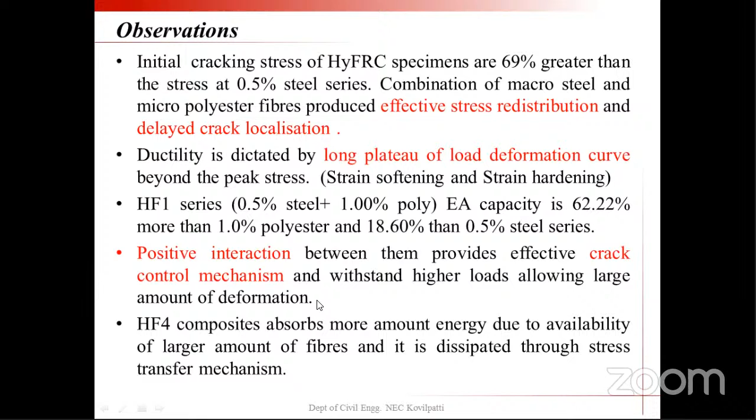So some important observations were made. Concrete without fiber, at 0% fiber, causes sudden failure, whereas in the other series a large amount of deformation takes place and failure is very gradual. The energy absorption capacity is 18% higher than the single FRC.

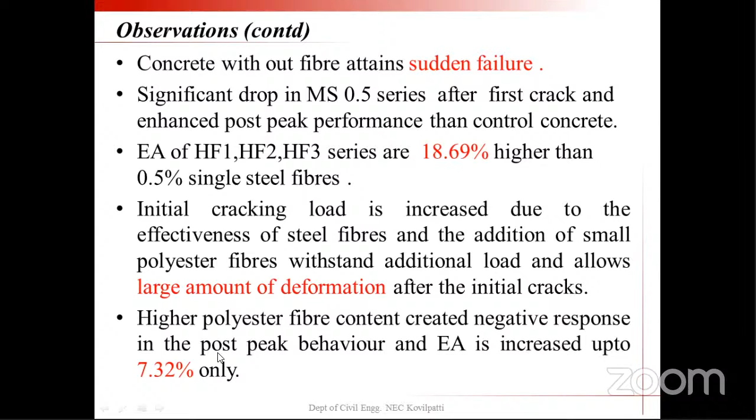The initial cracking load is increased because of the steel fibers, and the polyester fibers are able to withstand some additional load because it is a low modulus fiber, but it allows a large amount of deformation. Polyester fibers play a role in allowing large deformation; even after the cracked stage, the matrix will allow deformation. So with high polyester fiber content, sometimes negative responses are also observed.

Next, energy absorption under uniaxial compression. A normal cylinder of 100 mm by 200 mm is used. With the available testing facility, we conducted the test. If you want to measure some toughening mechanism, each code will specify sophisticated equipment which is not usually available in many places, because we need servo control equipment.

All those equipments are available only at SERC or L&T and IIT Madras. I came to know only 3 places have this type of servo control measurements. So I cannot adopt those testing procedures, other RILEM or JCI procedures. I just followed the methods which are available, which is possible, which is feasible by us.

So again, the dial gauge has been used and the load deformation behavior is noted and the curve is plotted using Simpson's rule. I found the energy absorption capacity.

For comparison purpose, I have taken the energy absorption capacity up to 0.6 mm deformation. Last time I took the energy absorption capacity for split tension up to 0.4 mm. Here it is taken up to 0.6 mm. So again, you can notice in hybrid FRC, the energy absorption capacity is in the range of 196 to 241.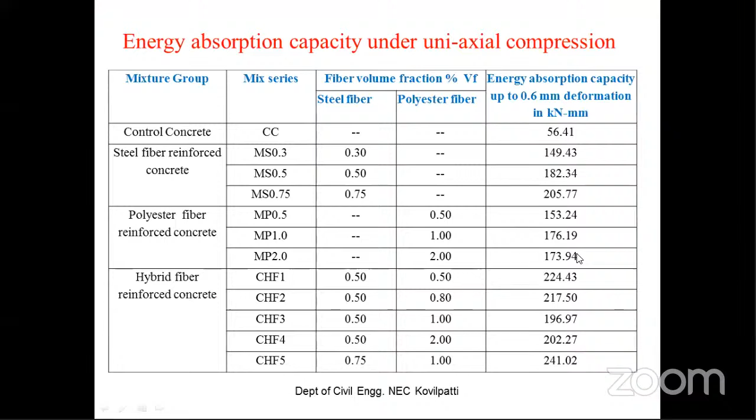And in steel FRC, it is 149 to 205. Control concrete without fiber, just 56 — it doesn't absorb any energy. Polyester fiber, it is enhanced, in the range of 153 to 176. So this is a comparison study with the help of the graph I have shown.

This is the curve we plotted based on the load deformation measurements. The area below the diagram is measured up to 0.6 mm, taken by Simpson's rule. The area below the diagram is reported as the energy absorption capacity in kilonewton mm.

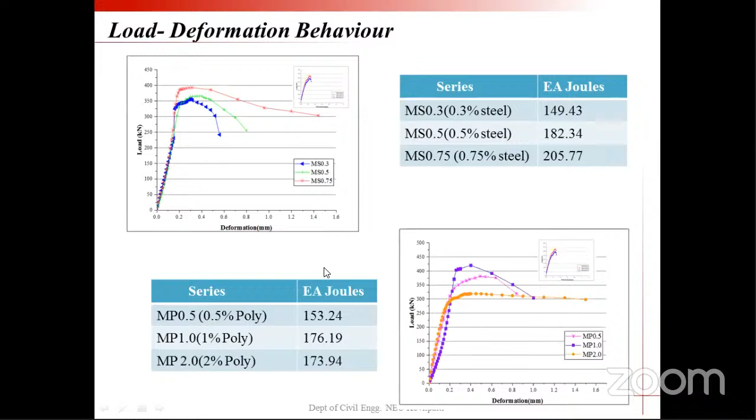And this is a comparison made between the steel polyester fiber series, and among all the hybrid fiber series, C is included just for compression. So nothing changed from the previous specimens, just C is included for compression testing, uniaxial compression testing, so C doesn't make much difference.

So MS 0.5, which is added with the polyester fibers, the energy absorption capacity is 224, 217.5. Polyester 1% addition shows 196, 2% shows 202, whereas the single steel has shown only 182. So all the 4 series have shown highest improvement in the energy absorption.

But one thing I want to mention in the experimental part: by adding something in concrete, we cannot expect a big change. People before doing research think like that, but once you get involved, then only you come to understand we cannot suddenly change anything. We cannot bring a drastic change through our experiments. Only a small change can be done, even though it is accounted for in our future investigation.

So this is CC 56 compared with the other combination CH4, which is made up of 0.5 and 2% polyester. So the comparison is made between 0% fiber and hybrid fiber combinations, from which it is made up. So I can see the big changes in this number, energy absorption in joules.

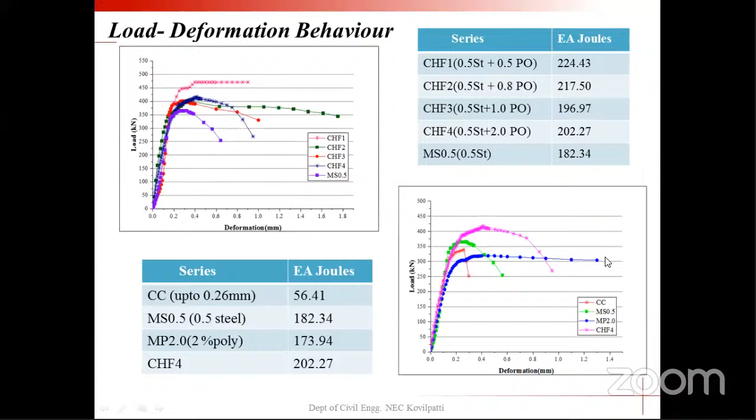strain softening behavior, and also this CH4 series shows strain softening and strain hardening as well. So polyester fiber has shown better strain hardening in the post-peak response. And the region prior to cracking exhibited, that is a normal property. Before the post-peak point, we used to consider it as

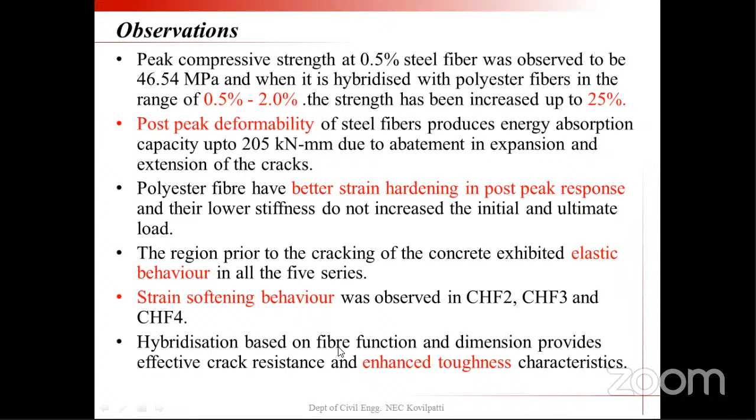elastic brittle behavior, so that is our general theory. And strain softening behavior is observed in CH2, in some series like CH2 and CHF3, F4. Hybridization based on fiber function and fiber dimensions provides effective crack resistance and enhanced toughness characteristics. So these are some additional points.

I have measured only the energy absorption capacity up to 0.6 mm for comparison purpose. Even though the curve is plotted till the end of failure, for comparison purpose, EA is measured only up to some fixed value. So the synergetic effect of different modulus and different size of fibers increases the energy absorption capacity.

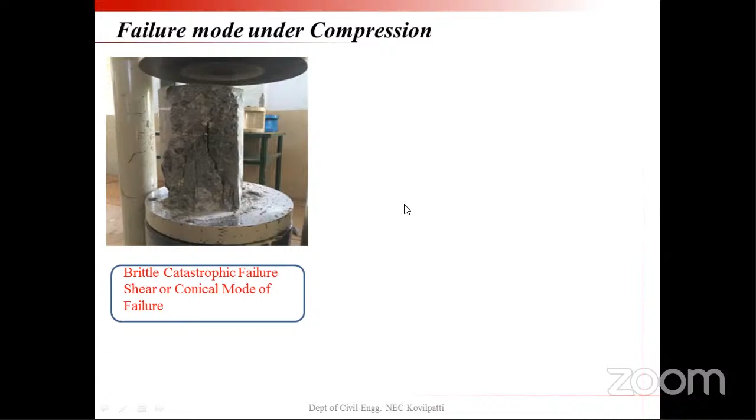After quantitative characterization, some qualitative characterization is also essential in FRC. We can see the brittle or catastrophic failure in case of plain concrete, but here it is a ductile mode of failure in case of steel fiber reinforced concrete.

We can stand very boldly near the equipment and do the testing when we are doing FRC. Whereas while testing the control concrete, we used to be scared about when the specimen will fail, because it's a sudden explosion, since it's M45 grade concrete, so the ultimate strength will be 65 to 70 MPa. When doing the testing in FRC, no need to worry because the failure is very gradual and ductile. We can do the test in a very safe manner.

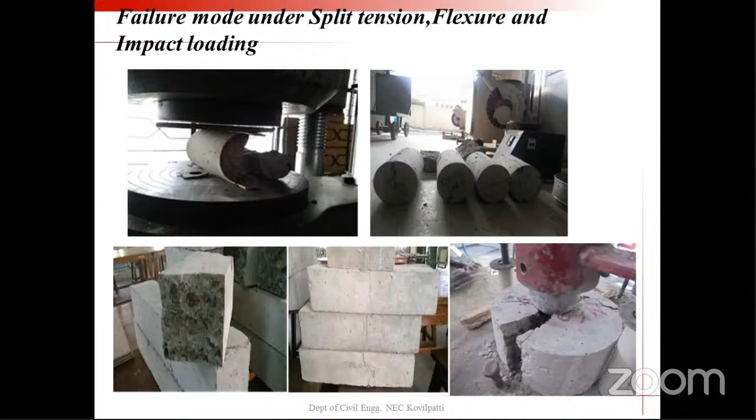This is during the time of impact testing, ultimate failure - we made the specimen undergo ultimate failure, so this type of observation has been made. This is during the energy absorption test, and this is control concrete - you can see the entire specimen has been split into 2 pieces. In steel fiber, you can see the stitching of fibers across the cracks. Still the failure is very slow and gradual, and it is not a brittle failure.

In the last picture, you can see the hybrid FRC. You cannot even see where the failure has occurred - only one single crack has passed. This is a crack which has occurred in the hybrid FRC specimens. So these are the specimens tested - even though it has undergone severe loading, we cannot see a big cracked matrix in these pictures.

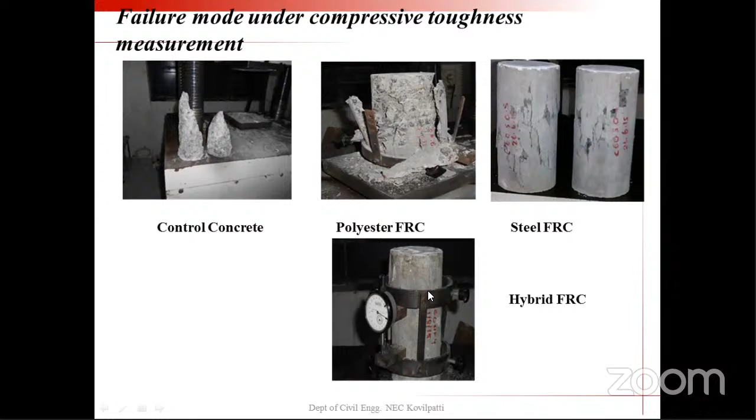You can see the tested specimen - it is actually a tested specimen, but no much failure cracks have been observed. So it has got a very good crack arresting mechanism.

The overall conclusion: compressive strength has been improved up to 25% with the combination of 0.5 and 1% polyester. In case of split tensile strength, significant improvement is observed in the range of 63 to 72 for the 0.5 steel and 0.5 polyester combinations, and a marginal small drop is also observed from 88 to 80 for 0.75 because of the excess dosage of 1% polyester fiber series. Flexural strength has been improved up to 37% with the inclusion of 0.5 steel and 1% polyester, and 60% for 0.75 and 1% polyester.

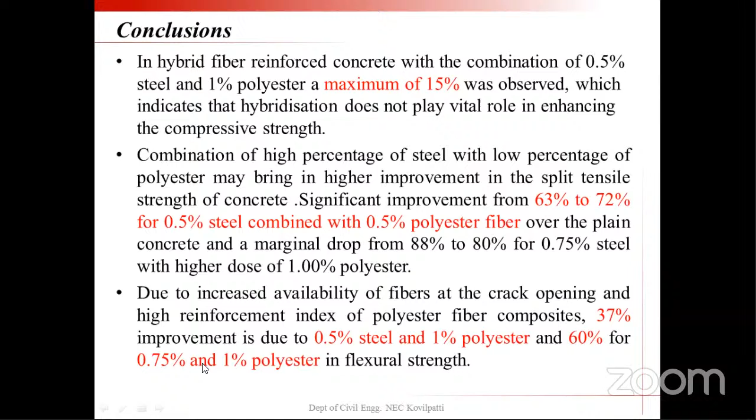Whenever you're thinking about the impact resistance, it is improved from 4 folds to 60 folds. And in ultimate crack, it also improved from 5.6 folds to 347 times. So all these improvements are only because of the incorporation of hybrid fibers.

So the failure pattern is proven through the photographs - all the failure pattern has been observed as ductile failure, and energy absorption capacity toughness has improved from 26 to 72 in comparison with the polyester fiber, and between 10 to 18% when compared with the steel fiber. So when comparing this pure steel fiber, the energy absorption capacity improved up to 18%. When compared with pure polyester, it has been improved up to 72%.

In hybrid fiber reinforced concrete, highest energy absorption is exhibited at 224 joules with 0.5 steel and 0.5 polyester in combination, and 241 joules with 0.5 steel and 1%. So from all these results, I understood steel fibers dominated the entire energy absorption capacity. Also, initial cracking stress has been improved from 13 to 69%, and peak compressive strength under uniaxial compression while measuring the toughening is also improved up to 25%.

I didn't present the ANN modeling which I did in the PhD work, because we cannot do all the experimental procedure - it involves some laborious work. It's very difficult to make specimens and do testing every time, so the practical difficulties are involved.

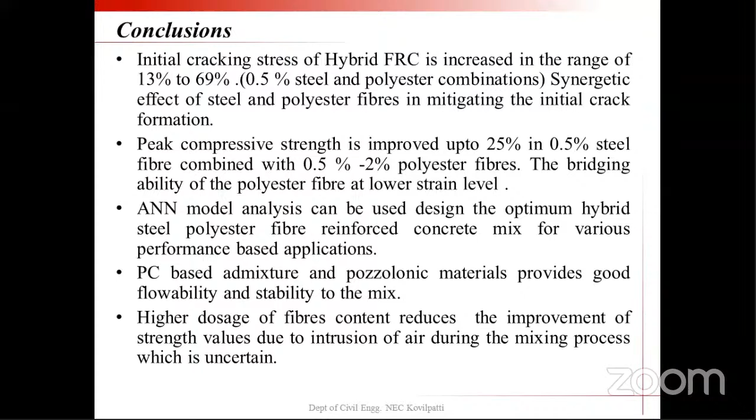I want to mention the PC based admixture provides effective dispersion of fibers and flowability and stability to the mix. So this PC based admixture is highly recommended, and higher dosage of fibers reduces the improvement mainly because of the polyester fiber intrusion of air during the mixing process, which is unavoidable. That causes some decrease in the strength values.

And the cost analysis: since it is a special concrete, we are adding some extra material. Normally the cost of this steel polyester fiber is not going to be cheap. It increases the cost by 75%. While considering the extended life period, even though the material is very costly, the enhancement in mechanical properties and extended service life makes the material a more promising option for concrete pavements, industrial slabs, overlays, concrete barriers, tunneling segments, etc.

My experimental work is limited to few fiber volume fractions. I considered only one geometry and M45 grade of concrete. So in future it can be extended for other volume fractions, and the aspect ratio and geometry of the fibers can be changed, along with strength of the matrix. All these factors govern the properties of the entire composite, so we can change them.

For the stress strain relationship, I only took the load deflection curve and stress strain curve. We can establish some new empirical equations for this stress strain relationship of steel fiber reinforced concrete. Analytical modeling work can be done, and we can study how fiber reinforced concrete and hybrid fiber reinforced concrete are effective in taking dynamic loading.

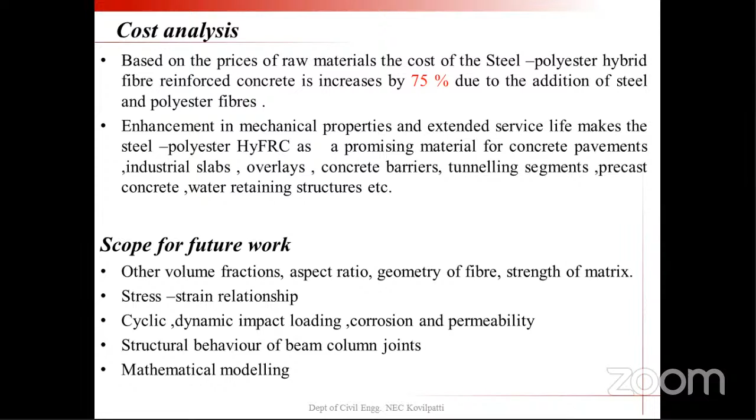All these procedures are experimentally done, and more mathematical modeling can be evolved. My experimental contribution is the measurement of energy absorption capacity and strength properties, and my analytical contribution has developed some equations which give energy absorption properties of steel, polyester, and hybrid fiber. We should also give some engineering contribution.

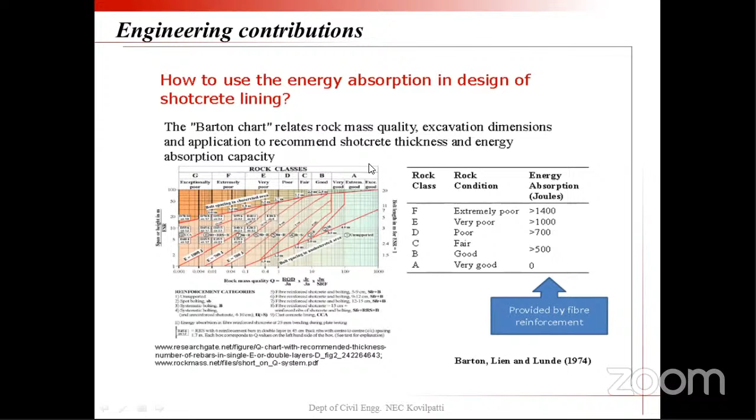Based on the energy absorption capacity, referring to Barton's chart, I can recommend what thickness of shotcrete can be adopted for the shotcrete lining design. For example, if energy absorption is greater than 700, it is poor; if it is greater than 500, it's different. Based on the fiber reinforcement, we can judge the thickness of the shotcrete that can be designed.

These are the publications made out of this work. The first three are purely based on the experimental work, and after that I extended my research interest in fiber reinforced concrete, recently working with Juliflora fiber reinforced concrete and publishing a paper in Taylor and Francis. Further, with the help of students, I worked on metal-based and plastic-based fiber reinforced concrete producing a Scopus Index journal, and glass fiber reinforced concrete. So repeatedly, I wanted to explore only the properties related to FRC and hybrid FRC.

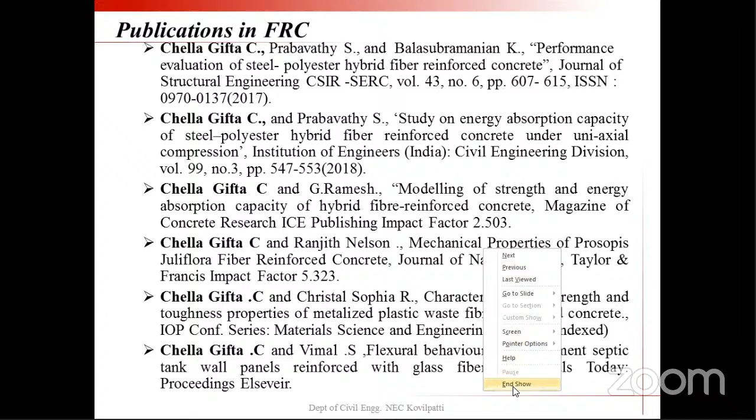So this is all my presentation, and I thank you very much for giving this opportunity, and I thank the participants for sparing your valuable time and attention.

Thank you, madam. Very informative and wonderful presentation you have made. Sir, in the last around 1 hour 15 minutes, we could not move from our place, that much inspiration you have made through your presentation. Thank you, sir.

Especially you have highlighted the steel, polyester and hybrid fiber, and how the properties change, especially to prevent crack control, which is the aim of your research work. And you have made in-depth research studies. This kind of research-oriented presentation will help younger faculty members when they attend this type of program, learning how the experiment is to be conducted, how to make the models, how to find accurate results, and how to draw the graph.

Many research scholars are not getting any awareness of what to do practically. So today you have taken all the young faculty members, those doing research work or those who want to do research work, to the civil engineering laboratory. Certainly the participants are benefited by your projection of work related to steel, polyester and hybrid fibers.